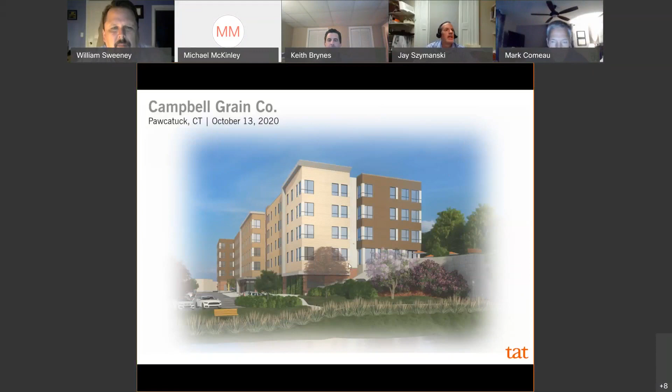Great, thanks Bill, thank you all for taking the time tonight. We'll go through a brief presentation, and then we'll take any questions you might have. So just by way of reminder of the comments that we got last time, this was when we met on September 14th. There were 6 main topics, and some of them overlap a little bit, but we'll just go through them quickly.

Number 1, there was a recommendation to use some brick material in accordance with our historic mill reference that we were using for design inspiration. Number 2, recommend introduction of simple window trim and cornice. Number 3, the board felt the design needed more work to avoid an institutional character. Number 4, there was a request for building cross sections to better understand how the site and the grading was working on the site.

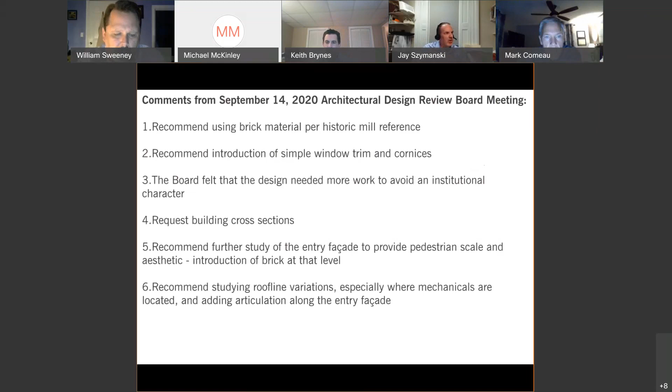Number 5, there's a recommendation for further study of the entry facade to provide pedestrian scale and aesthetic, and again the idea of introducing some brick at that level. Number 6, there was a recommendation to study the roof line and potentially add some variation, especially where mechanicals are located, and add some articulation at the entry facade. There's some overlapping there, but in general we addressed each of these comments in one way or another.

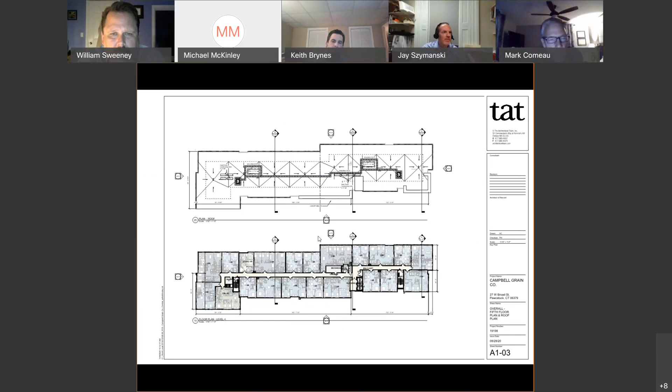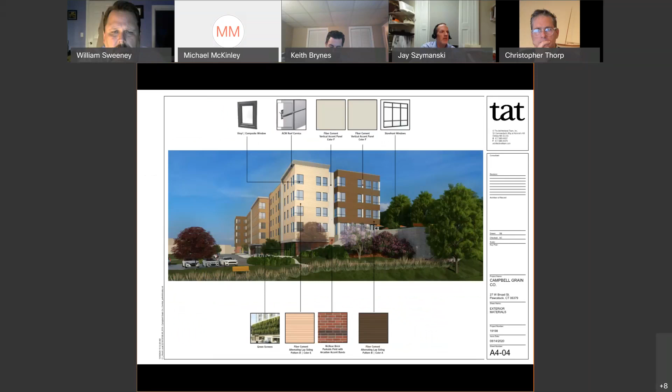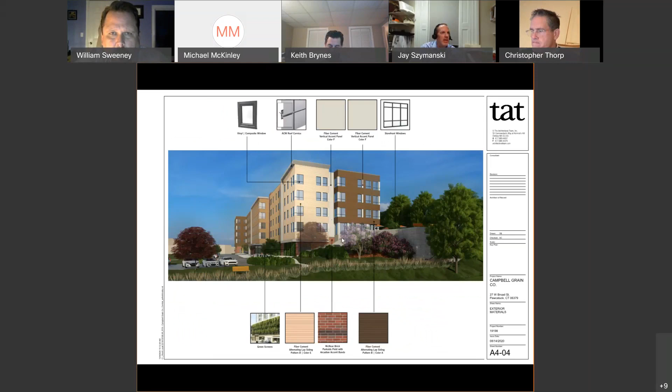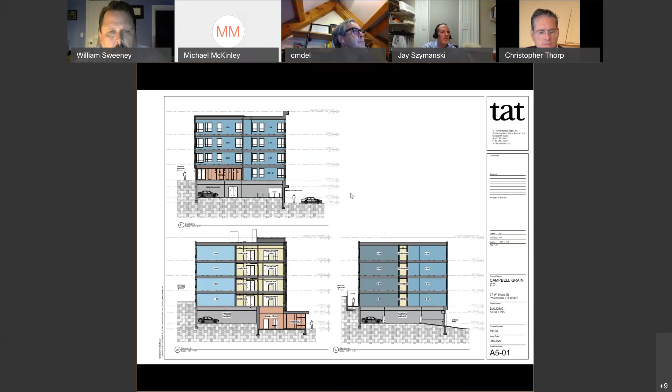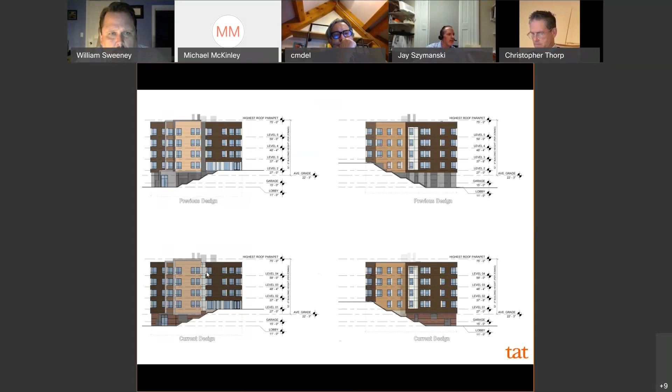On the top left is the water side previous design, and below that is the corresponding new version of that same elevation. You can see the change from metal panel to fiber cement panel in this vertical recess, and then you can see the brick on the base here.

We also lowered all of these masses to some extent, a couple feet. You can see how tall the base was before. We brought all of that down a few feet, giving it a lower scale.

These two are again the previous and current on the opposite end, the end facing town. Again, the biggest difference here is the metal panel on the base has been replaced with brick on the bottom, and that whole mass has been dropped a bit.

For example, you can see the dimension at the bottom of this white recess at the top. Compare that to what we have here - they're roughly equal now, whereas before it was much bigger on top and smaller on the bottom. The effect of that was creating a much higher base. Bringing that all down makes this a much more pedestrian-friendly scale.

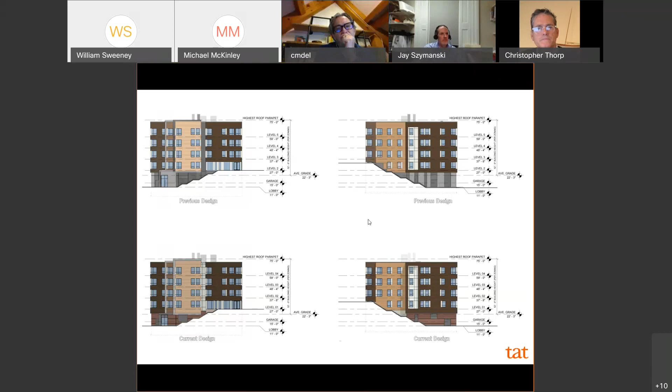So again, this is a comparison of the line elevation. On the top is the previous design, on the bottom is our current design.

There's a number of changes here in this facade. The biggest one, I think, is the change from metal panel to brick. So this whole base is now clad in brick, along with this tower element that really signifies the entry to the building. It's right adjacent to the entry lobby, which is here.

We mentioned making this recess deeper, changing that from metal panel to fiber cement. The cornices were beefed up a bit, so you can see this cornice is much heavier than it was before. And this cornice added a subtle angle there to add some motion to the end of the building.

And then the other pieces - these three were actually lowered, brought down a bit. You can see how there was a sort of heavy forehead here on the top of the building, whereas that's been reduced quite a bit.

You can see the dimension from grade up to the bottom of that residential piece, and here that's been reduced. Similarly, the height of the lobby canopy has also been reduced. So all of that scale on the ground level we feel is much more comfortable dropping that down, and also softening that entry with the green panels.

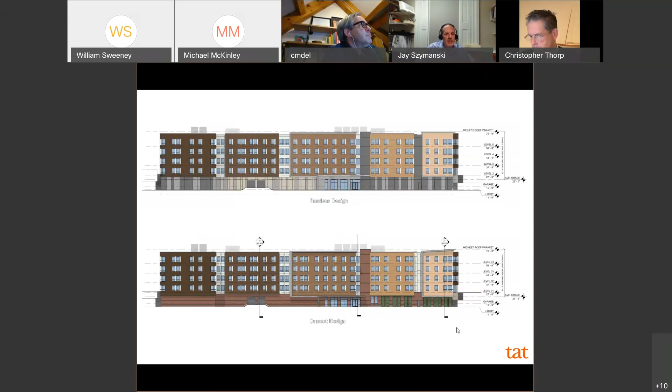And this approach really got the most discussion last time - really being the first thing you see as you enter the site, where previously this was a very high metal facade, a blank metal facade. So we brought that down, added the brick, and then softened it with the green screen.

Here are those windows that I mentioned that were added into the garage lobby. Again, in this view, you can see how pushing this stair back adds some depth to the facade and breaks it up a little bit more than we had previously.

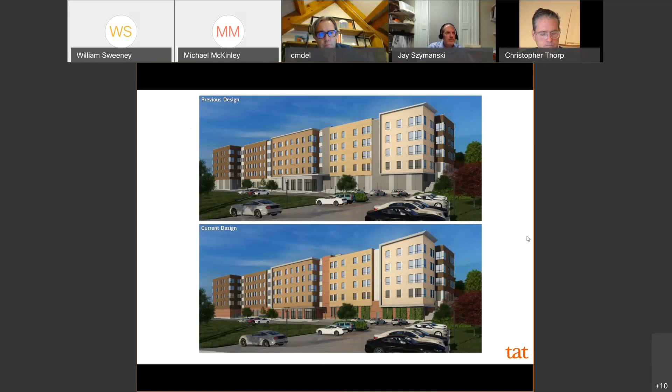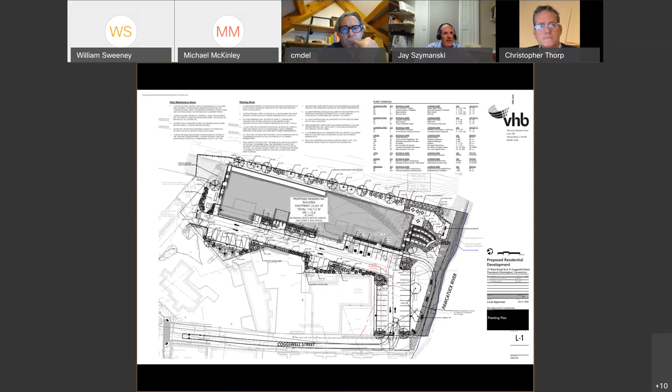And the last slide is just a landscape plan. We don't have our landscape architect with us today, but the change really is this sidewalk was reduced in width a little bit so that we can get planting up against the building here.

So not only do we have those green screen panels, but we also had at grade, we added quite a bit of plantings there to soften that whole edge and make this whole pedestrian entry a little bit more friendly.

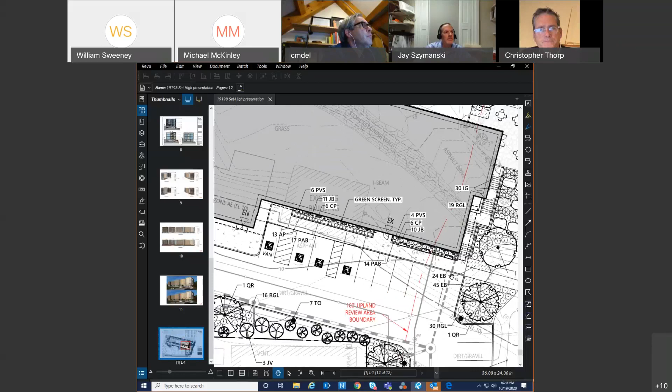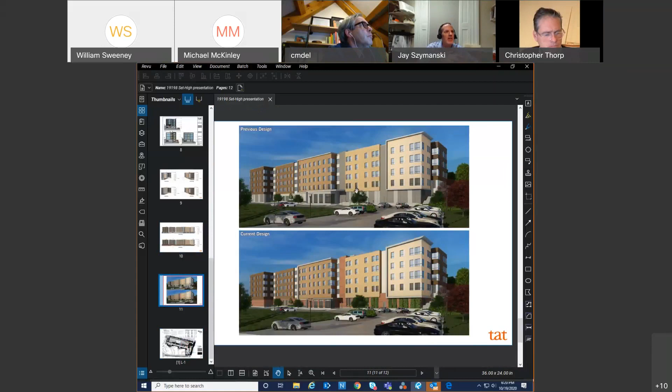So that's where we are. Those are the changes that we made. And like I said, I think we hit each of the comments to some extent. There was one more actually - there was a question or comment on adding some detail in the windows.

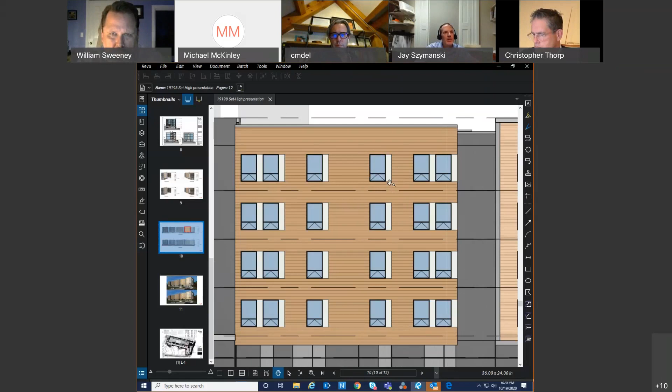We intentionally kept the windows very simple, so they are set back with a recess of about 3 inches from the window frame to the adjacent field. We wanted a clean facade without window trim. We originally had a solid panel next to each window, so we added one level of detail by adding a joint in that panel that coincides with the horizontal molding - just another level of detail around the windows without going to the level of adding window trim, which we didn't feel was appropriate.

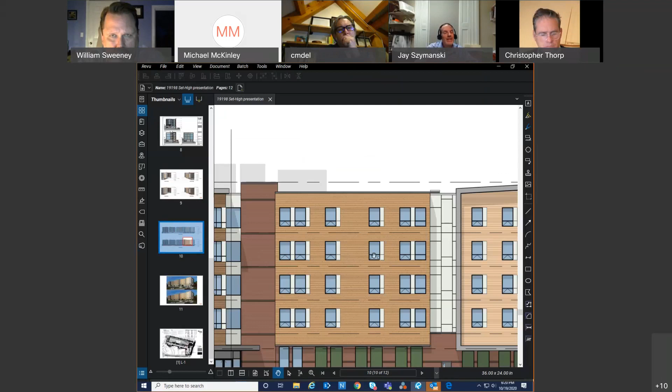That's about where we are. I think I've covered all of the comments in one way or another, and some of them are overlapping. I think we hit all 6. With that, if you have any questions or comments, we'd be happy to take them.

All right, thank you, Jay. I think it was Jay, correct? That's right, yep. Are there, back to the board, are there comments? This is Michael, by the way - sorry, I didn't say that. How would you know? Anyway, comments?

This is Chris. I just wanted to say thank you for coming back. I appreciate the chance to actually see it and review it, and appreciate the additional detailing you've gone ahead with in the interim. I think the brick is successful in bringing down the scale and making it a more approachable facade at that level. I think it's gone a long way to helping that along, and I also appreciate the green addition at the base structure.

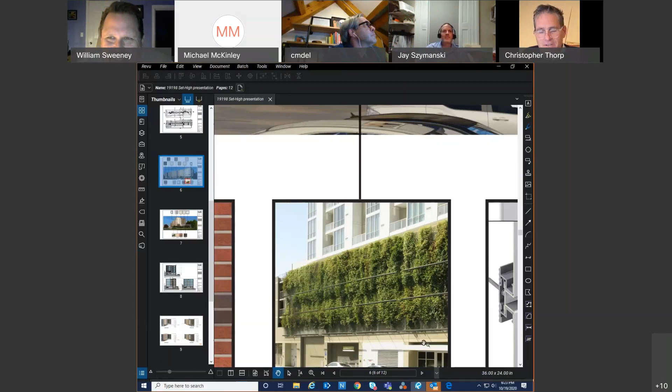But is the intent that the plant material would be living? Yes. Got it, we're not talking synthetic. Correct. Got it, thank you.

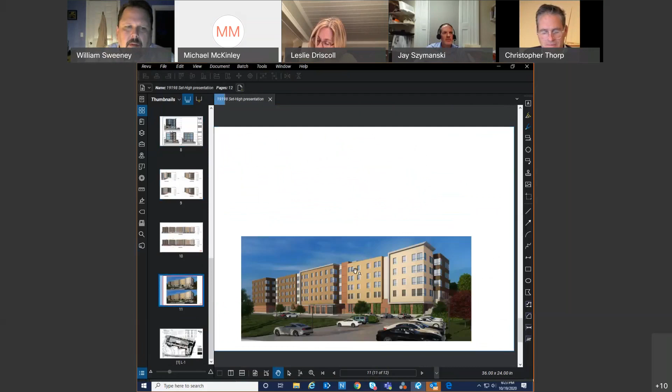This is Jenny. I like the brick on the elevator shaft going all the way to the top. I think that adds some good authenticity to it, and I like all your improvements. Thank you very much. Thank you.

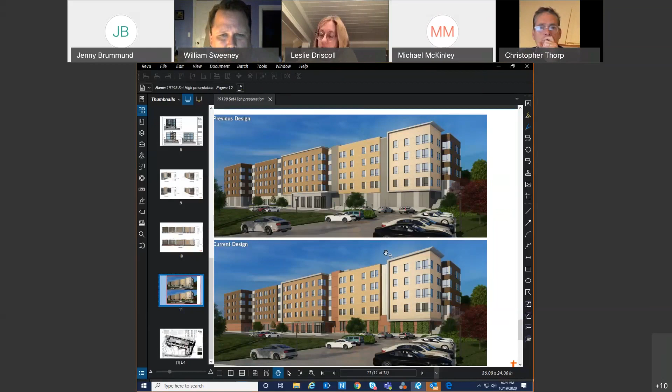Further comments? Yeah, I'll comment since I had the comment. This is Leslie Driscoll - since I had the comment about adding brick to the facade at the last meeting, I do like the way you've incorporated brick into this and lowered the ground level heights by lowering that fiberboard siding, and angling that section closest to us here, the roof line of that. So those proportions feel a lot better to me. It just kind of softens the building. So thank you.

Great, thank you. We really think it's a superior product, and we certainly appreciate all the comments that the board made, and we certainly did our best to try to incorporate them to the extent we could. So again, thank you for your input. You're welcome.

So any further comments? Is Mark Comeau there? Yeah, I'm here. I think they're all contributing changes to the facades compared to what was presented last time. Love the green screen, and the cornice treatments and the elevation changes of the floors. I think it's all very good responses, and I think it's good to go.

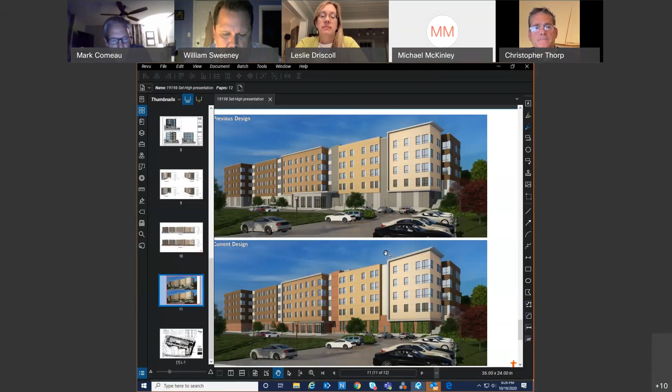Okay. All right, then without further ado, is there a motion that can be made? I would move that the board approve the amended application as presented tonight. I'll second, Mark. Okay, thank you, Mark. All in favor?

Aye, aye, aye, aye. I would like to just abstain, just because I still think the density is too much height. That's okay, okay. Of course, we can't really - it's not in our purview, but that's certainly a real issue. So we have a quorum, correct?

Yes. Keith? Yes. Okay, so four, we have approved - we have approved the application. Right, with 4 votes. Thank you, Mr. Chairman.

Yeah, oh, thank you. I think it was a genuine effort in the circumstances that we know legally was not required, and it took some energy. So, from my opinion, fair play, and thank you. Have a good rest of your night, and good luck with the rest of your meeting. Thank you, take care everybody. Thank you, good night.

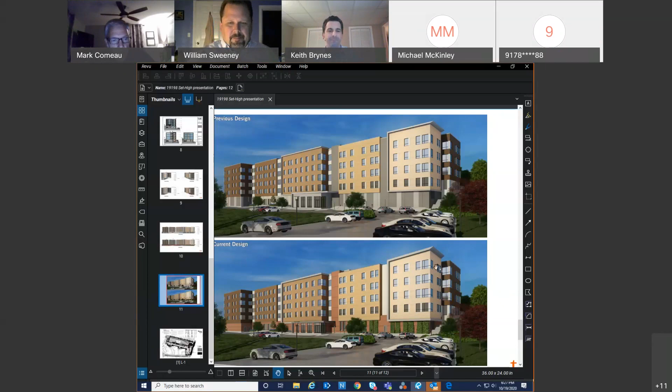Mr. Perkins. Okay, well, hello? Hello? That's Brett, right? Or is it? It is Brett, and I'm trying to get on the WebEx right now, so bear with me.

So, but in the meantime, did we have Chris Delaney show up? Yeah, I'm here. Sorry, I was a little late. I had some Wi-Fi issues. Don't we all?

So we can proceed, I believe. We just, for those of you who just tuned in, approved the first applicant because excluding Mark, we would not have had a quorum, I think is the way that worked. So now we're taking the second application, the automotive service gas station application.

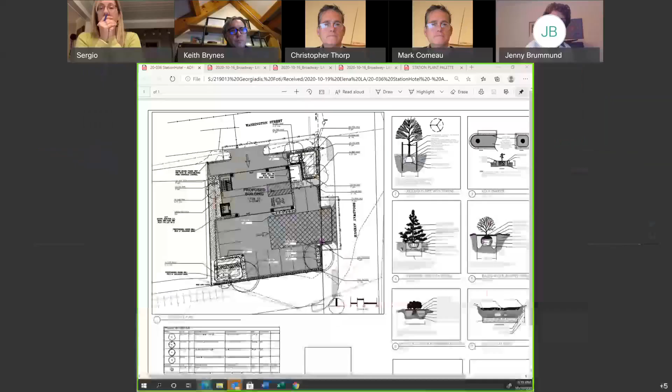Keith, if it's okay, can I share my screen? Sure, yeah. I'm going to bring up the landscape plan. I think you all are familiar with the project area on the corner of Washington Street and Broadway. The proposed building is a 1,700 square foot building footprint on more or less 0.18 acre site.

The previous site, as it sits today, is an abandoned gas and service station, and it's being redeveloped into what is now a 5-unit hotel with a resident manager unit, so a total of six hotel rooms. Mr. Comeau will get into a little bit more detail on the building.

Some things have changed with respect to the site amenities as well as the building to complement more of a hotel, taking in effect your comments from last time. As you can see, the configuration of the site has not dramatically changed. We're still proposing a one-way entrance from Washington Street underneath an elevated building to meet flood code compliance, and then bringing those vehicles through with some parking and out onto Broadway.

You'll see in the corners of the site where we will be putting in these bioretention infiltration areas that have been landscaped. We heeded the advice of the Architectural Review Board and focused on the streetscape, embellishing with some street shrubs and trees, as well as some around the perimeter of the site. And then there'll be a pretty significant landscape feature, which Elena will be going into, the green wall, which we're proposing along the rear of the property to mask the building that's more or less just off the property line, just to the west.

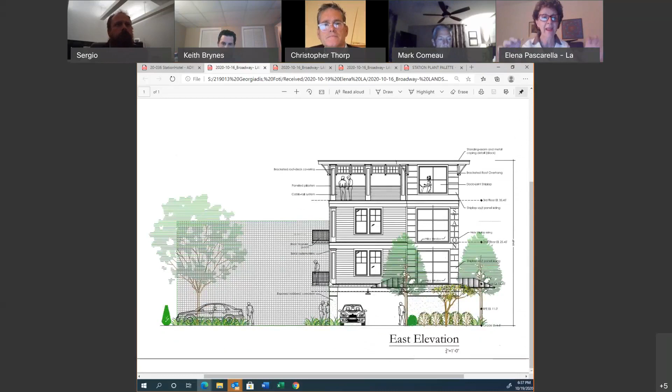The material is really quality material. What I liked about it was that we were dealing with a representative at Pride's Corner Farm in Colchester, Connecticut, so this would work nicely because you're buying local essentially. The structural component of the wall is fabricated at the Live Green facility — the lattice structure, the irrigation connections, and the trays that hang onto this structure — but then they ship it all to Pride's Corner Farm, and Pride's Corner Farm fills it with the topsoil and the plant material that we select. So essentially you're buying plants locally.

This view shows you the right side of that elevation. You're looking at the area that would be one of the infiltration basins. You have a couple of street trees — we're proposing Heritage River birch — and then plant material around the infiltration basin, small shrubs that will tend to keep people out of the basin itself, things that are good for visibility, because we don't want to block the view for people walking around on the sidewalk.

I've also selected plant material that's road and coastal salt tolerant, and also deer proof, because I understand from a friend who lives in downtown Mystic that you now have development happening up along Mistuxet, and I guess the deer are losing their habitat and coming down and browsing in people's front yards. So, a sort of unexpected thing for an urban village, but it's happening.

To the left side of that elevation, you have the parking area. We have thornless honey locust trees in that area, some dwarf grasses, and then along the property line we put in a row of horizontal evergreens to screen between the fire station and the hotel site.

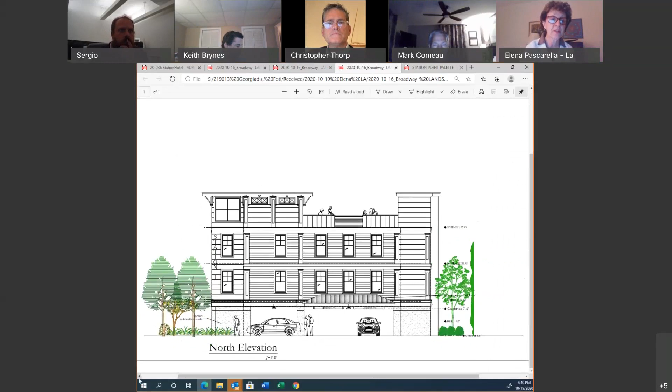The next one, please, should be the north elevation along Washington Street. To the left side, you can see where that one infiltration basin is on the corner, the two birch trees and a witch hazel, and some other dwarf fountain grasses. Along the right side, you can see a symbol for the green screen element, although that element's going to be just along the property line, as you saw in the initial elevation. It won't continue up to the corner on Washington Street — there's no need to, since the hotel on that side does not have any windows.

Guess what we're looking to do is really green the site. You've got something that's very impervious now. We're making it a lot more permeable, really giving the area more curb appeal to help integrate it into the Mystic neighborhood.

I guess I'll open it up. We also provided a plant palette with some images. The infiltration basin will have a variety of herbaceous material that does well in areas that get wet periodically. It's available through Pride's Corner, not Pride's Corner Farm. It's available through Allen Seed Supply, which is in Exeter, Rhode Island, and I'm sure you could get it from other locations as well.

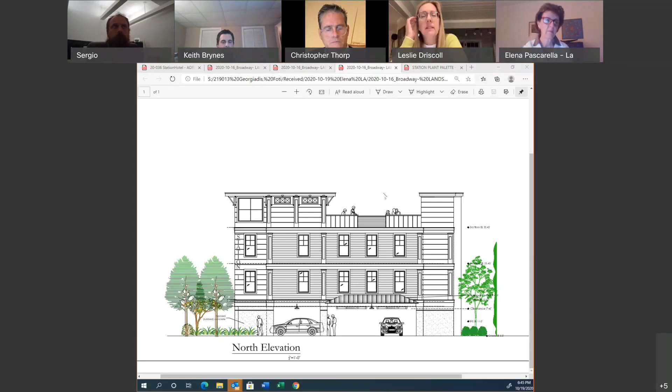I just had a question about the green screen, which I love those. Is it freestanding on the property or is it attached to the building next to the property? It's freestanding. Okay. And it only goes as far as the building, and then you can't really see it as well from here. It will turn into the building corner. Okay.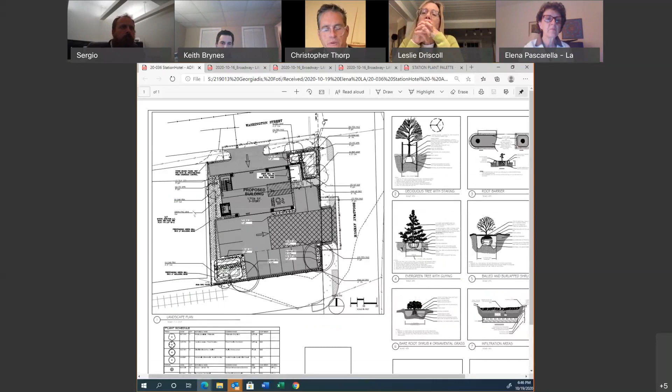You see it on the plan better. It's only anchored to the building on this property owner's side in the corner, the northwest corner. Yeah, but it's freestanding structurally. I mean, I'm going to have to defer that to the company. They provide information in terms of the weight of the various materials, and then they recommend that a local structural engineer look at the entire unit and determine how best it should be anchored.

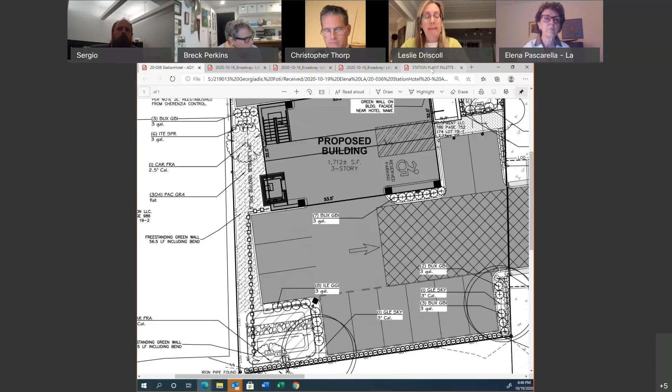And the detail that you're showing on your palette shows that it's adhered to a masonry wall, so I think that's where your question is coming from. Yeah, but it will be on the masonry wall at the very corner of the hotel, where it says Station Hotel, that northeast corner. Yeah.

This is Michael McKinley. I think we can come back to landscape whenever needed. But I think it's responsible to mention - I don't know how many of you have seen comments from the public. I saw comments on the Stonington forum, over 100 comments on this particular project, based on, I believe, one rendering that was published. I'd like to ask the board members if they've seen that and how they'd react. If no one has, I could summarize. I think maybe some of the public is listening tonight - I have no way of knowing, but welcome if you are, and I think it makes good sense to discuss this aspect of the project.

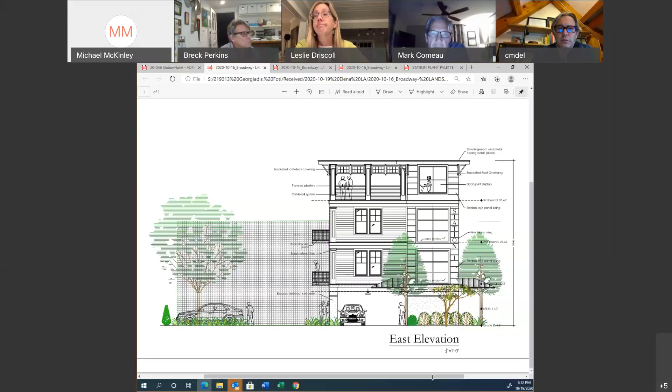Keith, can I jump in for just a second and clarify something? Sure. I read the comments - had to turn my phone off.

As a side note, Andrea Palladio started his career when Gothic was all the rage, and he despised Gothic, going down the path of a completely different set of proportions, materials, and truth in architecture. At first it wasn't received well, but today in architecture school we study Palladio more than Gothic architecture. I'm glad you all have the foresight to understand the context of those comments.

And I think the best comment is that this was not the best rendering we put forward. The building has these panel-expressed pilasters, a lot of the white and black materials that you see. I just want to share a screen here.

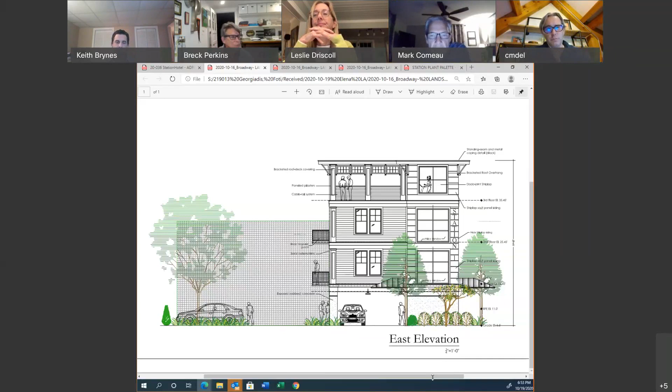The overall imagery we're looking at is something like this: a modern Connecticut farmhouse with the charcoal standing seam roof, white envelope materials, and black window frames and things like that.

These renderings that are asked for by not only this board but other boards are hard, because you have a computer program that's putting them together and throwing this through.

A few other things were mentioned last time, for instance announcing the entrance of the building from the street. But now it's a boutique hotel, and that doesn't happen from the street, so we shouldn't announce it from there. Instead, on the north elevation we have a standing seam metal roof that kind of announces where you drive in. I met with the fire marshal about a myriad of issues over the week, and where we have to discharge to the public way.

What the fire code wants versus what we as architects want are not always the same thing, so we can't always have the grand Andrea Palladio entrance to a building. But if we throw in all the elements, the scale and proportions, the form and space and order, all working with what we're trying to accomplish for the client and for the town, I think it all works really well.

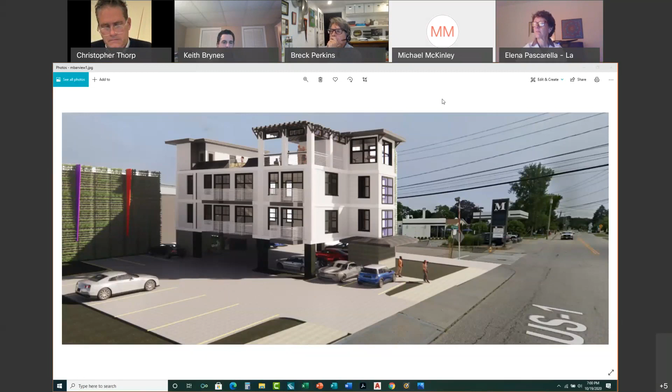To me, the test is whether the building has integrity and is true to the intent as presented by the design team and the architect. I think we've seen plenty of projects where that hasn't been true, where it's really fallen apart, because it's been excused by a brand name, or even worse, the project didn't have any intent, right? It was impossible to tell whether it had any integrity or not. As an architect, having been around evaluations for a while, it seems to me that would be the standard.

You can certainly look to buildings in our general environment here that are far from New England architecture but are very successful, like Addison Mizner's train station in Westerly, which, although it's not in Connecticut or Stonington, really is part of the architectural environment, or the library there. We're talking about direct Mediterranean, even Floridian influence.

At any rate, that's my two cents worth in overview. But I think the main point was that if we don't address why we're thinking this way, it's just going to be a rubber stamp on things without any real understanding of its impact on the community.

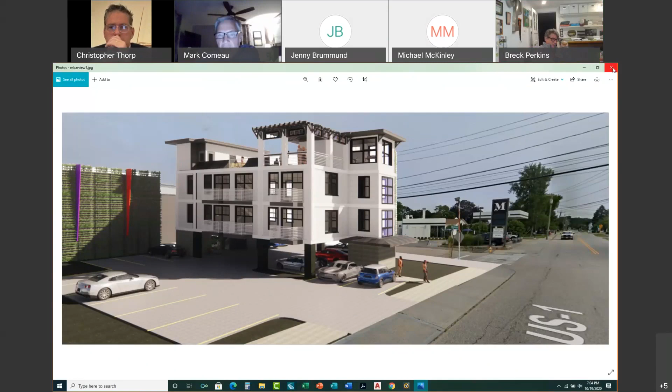If I could make a recommendation, I think the horizon you have in the background of the image isn't doing it any kind of justice. If you were to shoot from the opposite direction, you would catch the firehouse, which has some elevation to it in the background, and then it wouldn't look quite so big. I don't know if you have it in Revit where you can spin it like that, it might help. He has another view.

It has something to compare itself to, and it doesn't—I was thinking about further on down the road, but whatever. That even diminishes, with the focal point, the scale of the firehouse, which is a hard thing to do when you're mixing these medias of Photoshop and Revit and things like that. But you're right, it definitely changes the perspective of the scale.

With scale and height, one of the comments last time from the board was they desired to see the third floor even higher, but we can't because we're bumping up on the ceiling of our maximum height. I think in the end it'll be articulated much more cleanly and with more contextual elements than what these renderings really show. But you know that—you're all design professionals.

Thank you, Mark. I think those images do a great deal to help convey the aspects of scale and texture that Michael was speaking about, which the elevations and plans just don't convey. I would love to see it fully composed with plant material, because I think that's an important element of this composition, and it really helps with the transition of the edges into the neighborhood.

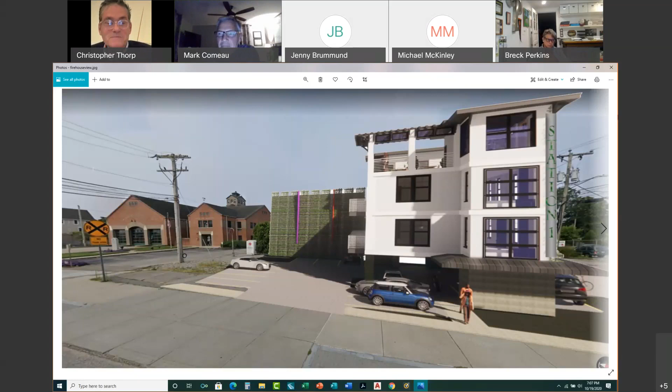Beyond that, I think these images are answering many of the questions I had about details on the building. It's not a Victorian structure, but I don't think that's what's called for here. As for a condition of approval, it's just a wish to simplify the plant palette a bit. The honey locust are doing yeoman's duty with potential for long-term scale, but I have a question about the appropriate choice on that corner, since there are competing interests for that material, and I recall there's an overhead power line cutting that corner as well. If there were fewer elements on that corner, it would help unify the surrounding canopy. But as a condition, I don't know what the other board members feel about that.

Just for clarification, this is Helena - you're talking about the northeast corner, at Washington and Broadway? I believe you mentioned there are birch and witch hazel there. Yeah, we can simplify that. But that would be my only request. Otherwise, I appreciate the thought and consideration that went into the application.